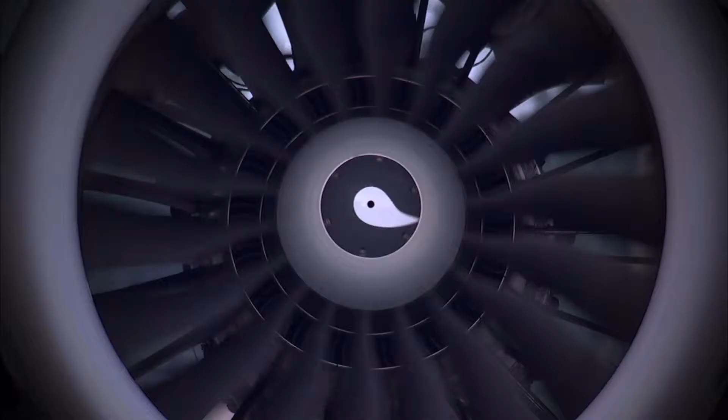The aircraft of today are quieter, more efficient and stronger than anyone could have imagined, even a few short years ago. Of course, future aircraft will continue this trend and become even more efficient and dependable, reaching unimaginable goals that today's aircraft could never reach.

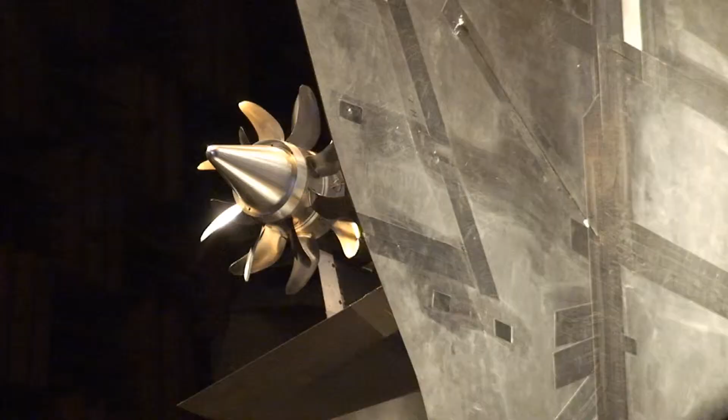But how will they reach these goals, and who is performing the important work to change the way we all fly? The common misconception is that most advances come strictly from major aircraft manufacturers. But the true story is much more complex. Unknown to most of the public is that one of the unsung leaders in aviation is NASA.

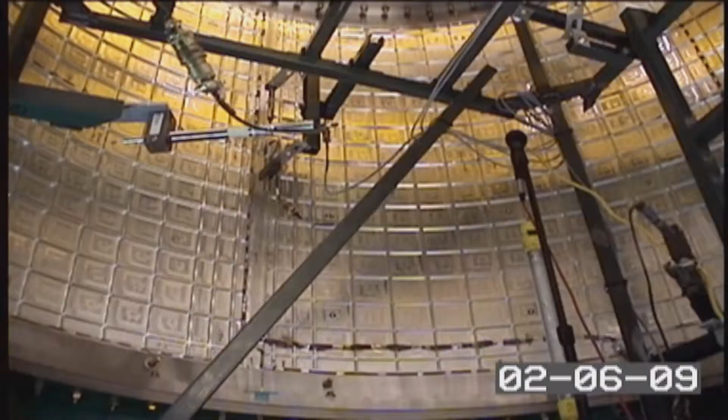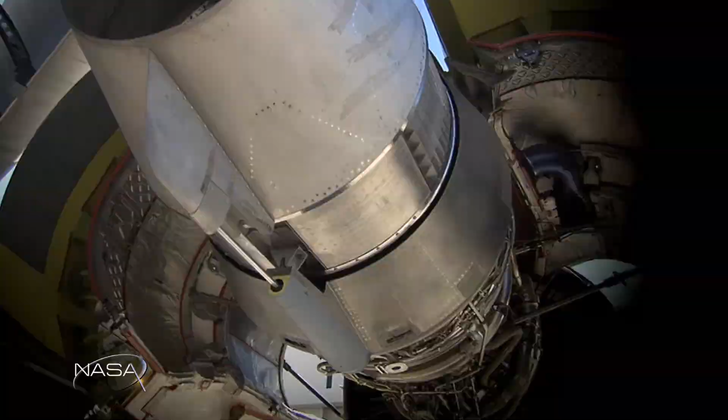NASA engineers work hand in hand with industry planners, developing and testing new designs to make aircraft safer, greener, and much more efficient. On this episode of NASA X, we will look at how this collaboration works, and we'll see how NASA and industry are paving the way for greener, safer aircraft for today and for aircraft of the future as well.

This is a familiar sight for modern travellers. Large metal jets roaring down the runway and lifting into the air. In fact, this sight really hasn't changed that much in the last 50 years or so. Other than the way most people dressed for flights back then, the basic concept of air travel is pretty much the same.

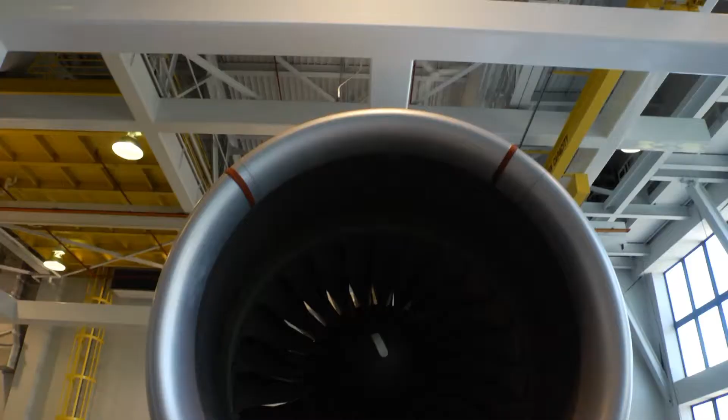There have, of course, been measurable differences in fuel economy, with new developments in engine design and noise reduction techniques. But the basic tube and wing shape and the material used to build these aircraft has remained pretty much the same for years. But that isn't the case anymore.

Like so many products that have evolved dramatically in the last few decades, like phones for example, the same is true for aircraft design. Today more than ever, researchers are pushing the boundaries of the science of flight in their effort to make aircraft of the future more efficient, quieter and greener. So who's taking the lead and why?

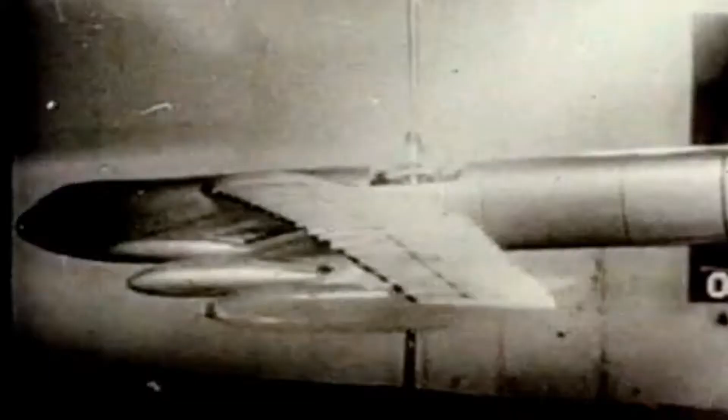Obviously industry is taking the lead in some areas because cleaner operations and more efficiency mean higher profits. But they're just not the only players. One of the leading innovators in aeronautics over the history of flight has been and continues to be NASA.

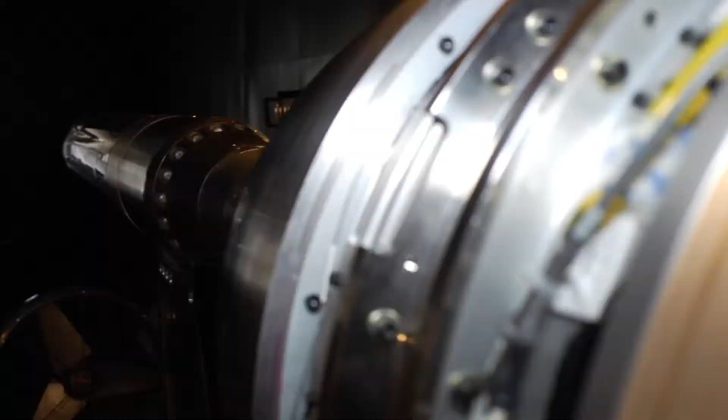The push to modernise and change aircraft of the future is being led by NASA's Environmentally Responsible Aviation Project, or ERA. The ERA project is putting its money where its mouth is with tough but reachable goals to make big changes in how we fly by the year 2025.

So the Environmentally Responsible Aviation Project is a 5-year, 6-year project, and it's focused on advanced aircraft design and the technologies that are needed to enable them. The main goal of the project is to reduce noise, to reduce mission fuel burn, and to reduce LTO NOx emissions. And LTO stands for landing takeoff, oxides of nitrogen emissions.

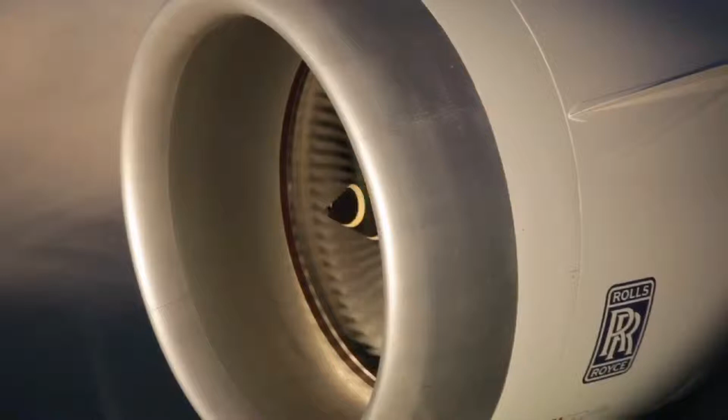And we want to do that simultaneously, and that's never been done before, where we looked at some very difficult metrics and tried to push all of those metrics down simultaneously. And so over this 5 or 6 years, we'll be looking at technologies, we'll be looking at aircraft designs and the combination of those to end up with a configuration that could simultaneously attack these goals.

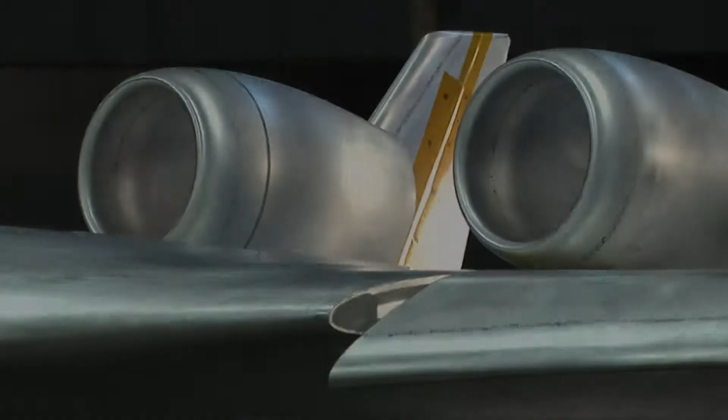So how do you make these goals a reality? The 4 basic principles of flight are lift, drag, weight and thrust. Finding efficiency in each of these basic principles will help reach NASA's stated goals. Let's look at weight first. Obviously, if you can reduce the weight of an aircraft, then you will burn less fuel and therefore become more efficient. Airlines are always looking for ways to carry less weight.

You can see that in extra baggage fees, reduction of heavy items such as ovens and heavy carts on some planes. And in one of the most drastic measures taken in recent years, some airlines have begun asking passengers to use the bathroom in the terminal before getting on the plane, making the passengers a little lighter.

In a 1-month experiment, an airline found that they reduced greenhouse gas by 5 tons simply by asking passengers to use the loo ahead of time. This proves that even small changes in the weight of an aircraft can add up to big long-term benefits. The holy grail, of course, is to make the entire aircraft structure lighter.

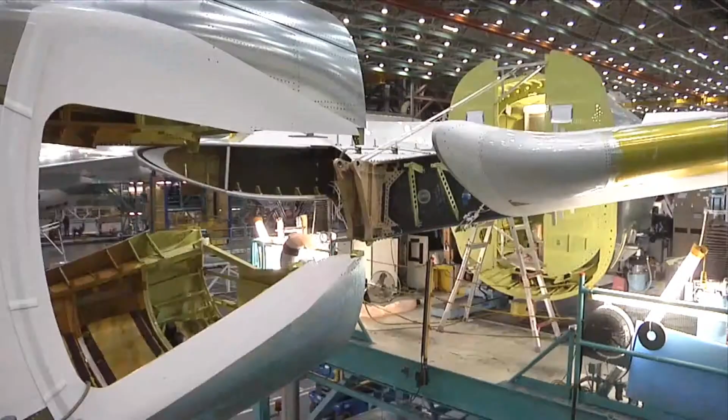So how can this be done? Today's aircraft are made out of metals that are safe, but that are also very heavy. So is there an alternative? In recent decades, NASA and its industry partners have been working hard developing new materials that could bring aircraft out of the 20th century and into the future.

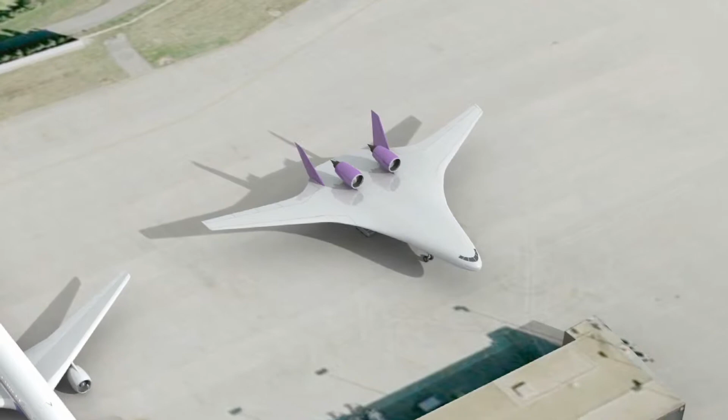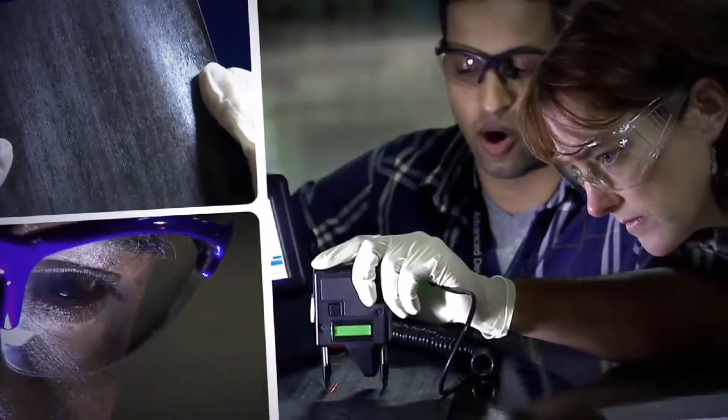New composite materials are leading the charge to replace conventional metals. Aircraft designers are taking advantage of composite materials' lightweight, strength, and flexibility. Aircraft designers have long known about these qualities and have been using something called carbon epoxy composite materials in small quantities for decades.

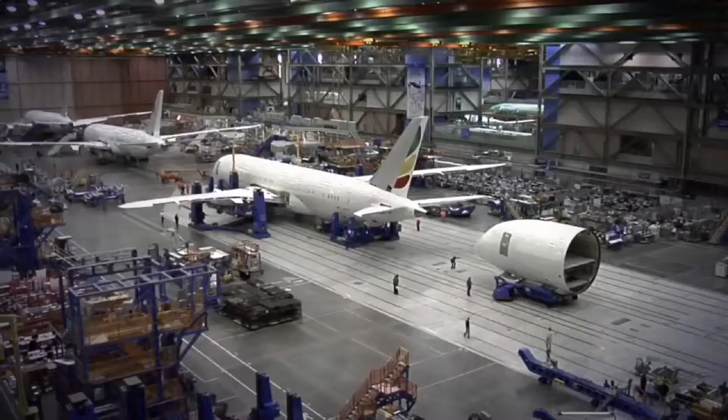After years of research and validation of composites for flight, the Boeing company was the first to step up and build an aircraft almost completely out of composite materials. Called the 787, this next-generation aircraft first came into service in October of 2011. As the first official commercial flight of the 787 took off from Tokyo that year, it was clear that this concept of an all-composite aircraft was here to stay.

NASA is not in the business of building aircraft, but they are in the business of helping lead development programs to move the science of flight along. Once validation and testing in the development process is complete, NASA shares its findings with industry in an attempt to help further research and development.

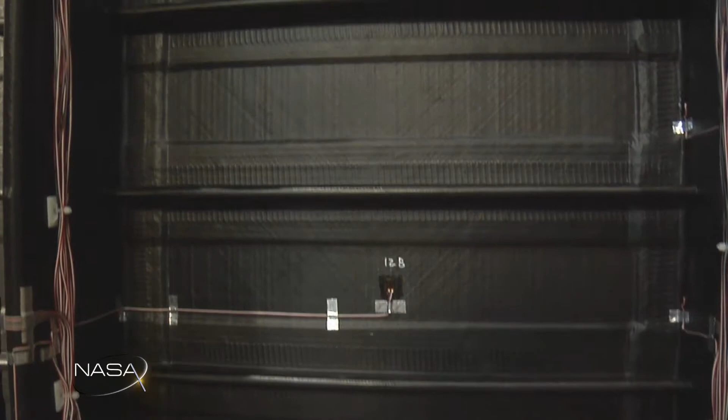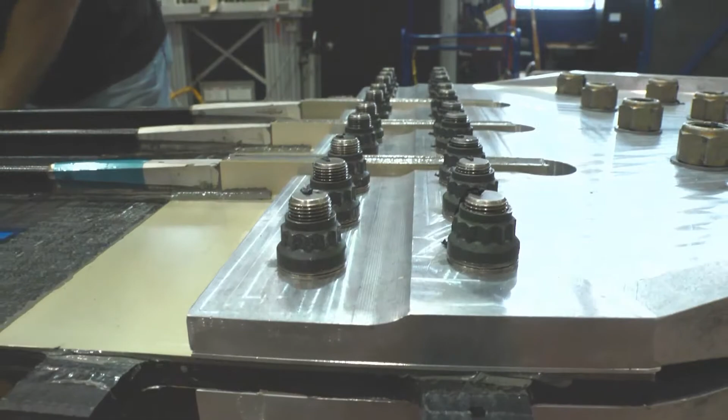One of the programs in which NASA is working with industry is in the development of new composite materials for aircraft. Here, in the Structures and Materials Lab in Building 1148 at NASA Langley Research Center, much of the development of next-generation composites for use in aircraft is taking shape. Called PRSEUS, this new idea has the potential to completely rewrite how composites for use in aircraft are made.

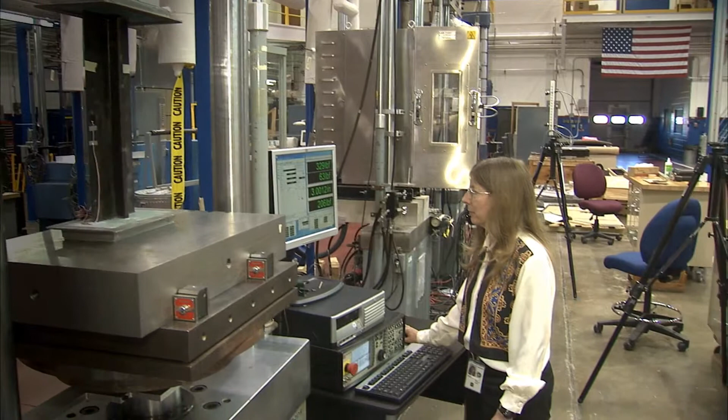Leading much of the research for NASA's environmentally responsible aviation program in the composite field is NASA Langley's Dawn Jegley. This MIT grad has been working with these materials for decades and has a keen understanding of what needs to be done to make these composites of the future fly.

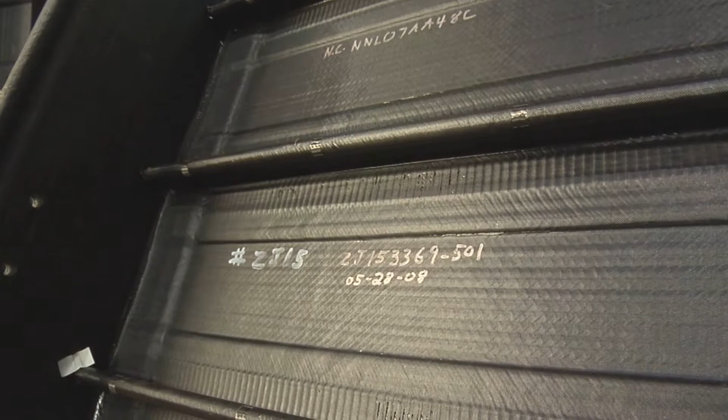PRSEUS stands for Pultruded Rod Stitched Efficient Unitized Structure. And what that means is that we have a graphite epoxy or a carbon epoxy structure, and what we have is pultruded rods inside carbon layers. We have a carbon skin, and we have stitches that run through the thickness that holds the whole thing together.

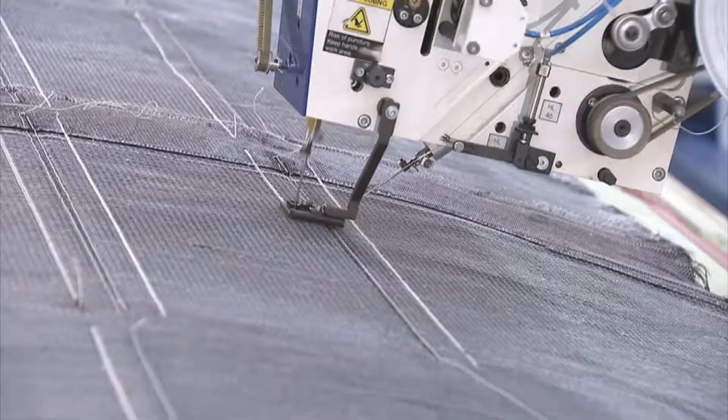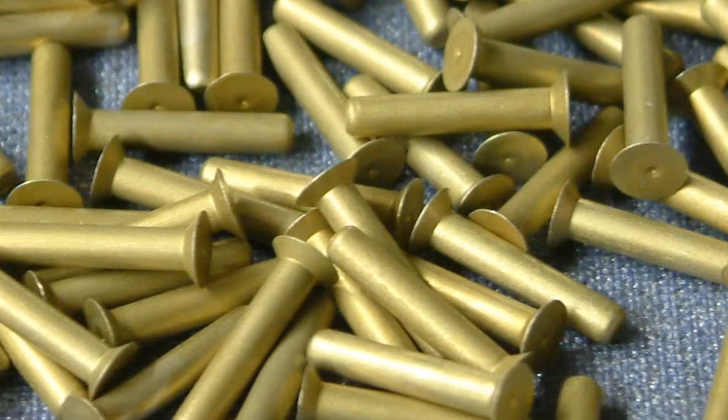One of the huge benefits associated with PRSEUS is its revolutionary stitching technique. On current metal and composite aircraft, one of the key components used to hold the vehicle together are the fasteners, like rivets or bolts. Although these are effective, one major drawback is that quite a few holes have to be drilled into each piece where the fasteners will be added. Not only is that labour intensive, but each hole represents a place where damage or a crack could start. But the stitching prevents that from happening.

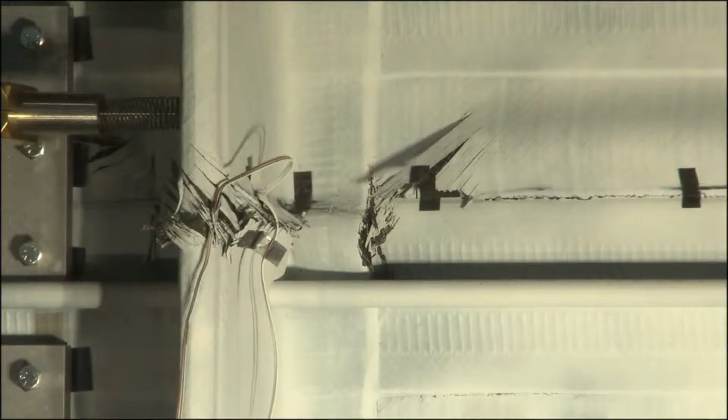We found that if you have a crack and it grows to a certain point and it gets to some place that it's stitched, that crack will turn. So instead of going through the stitching, it will turn, and that's a good thing because in flight you would rather not have a crack grow all the way around a wing. When you look at a piece of carbon epoxy composite material, it honestly doesn't look very strong in its raw form. But once it is in its final state, it can be much stronger than metals.

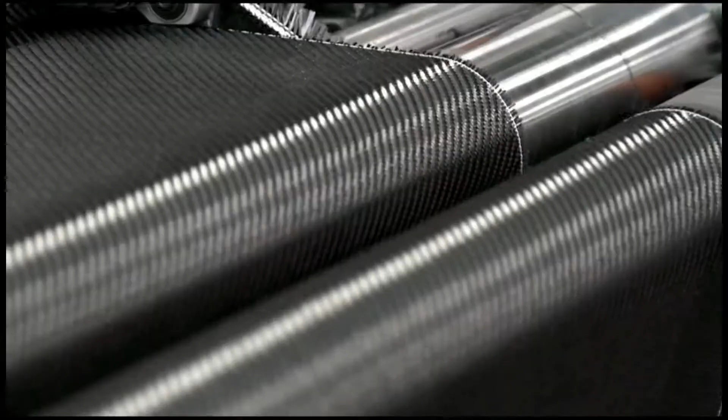We start out with a fabric. It looks kind of like carpeting. And you roll that out into the shape that you're looking for, and you position all the different parts of your structure where you want them, and then you come through with a stitching machine.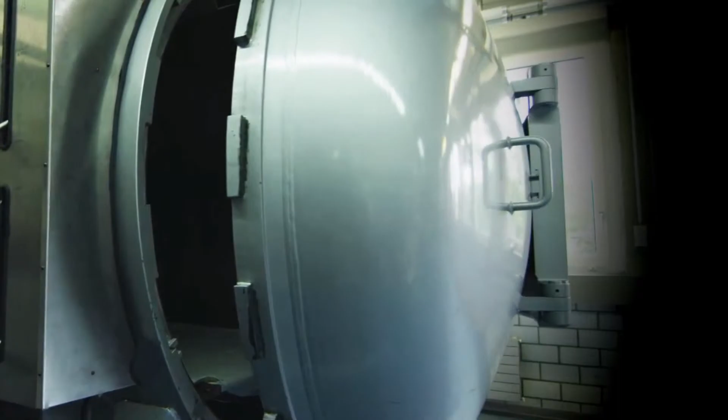After you've stitched the whole thing together, the panel goes into an oven. It's infused with epoxy. We heat it up, and then we get everything just the way we want it, and then we cool the structure. So what happens is you end up with a piece of material, could be a very large piece of material, which is now stiff and strong and just in the right shape that you want it.

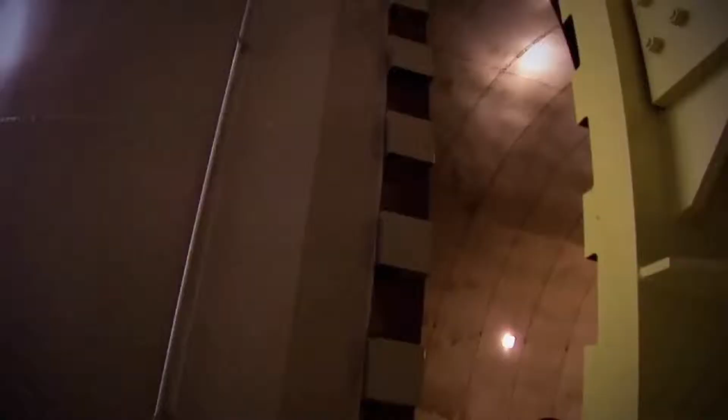Another key component to carbon epoxy composite materials is that they can be tailored to be much stronger than metal. At the molecular level, the properties of metal are isotropic, which means that the properties all run in the same direction. Because of this feature, aircraft designs are very bulky in some areas to provide stiffness, making a craft much heavier. But with composites, you are starting with fibers which are very strong, tough threads, and you can position those threads in any direction you want.

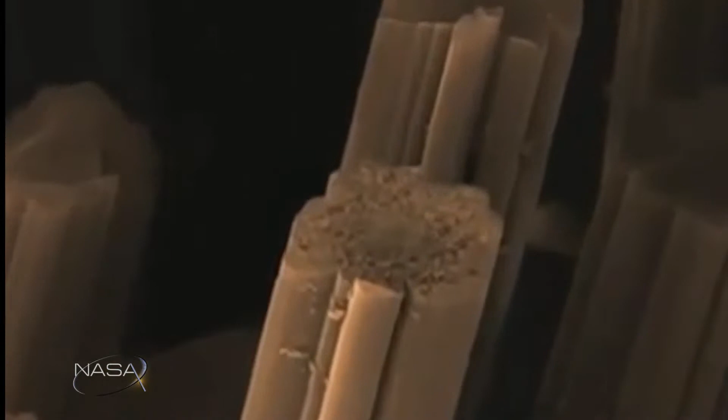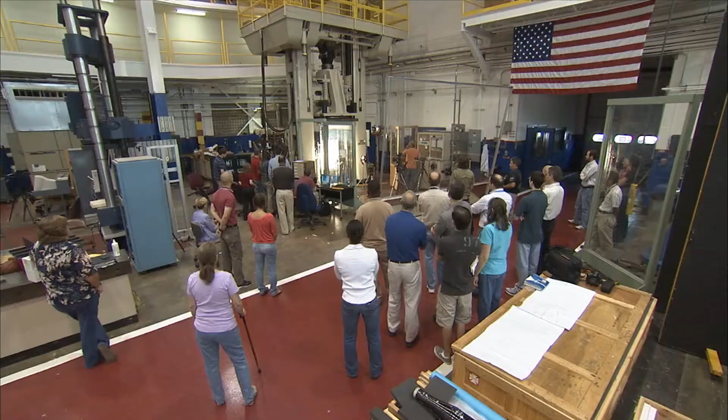For example, if there is an area on the aircraft that takes a lot of load, the designers can place the fibers in that direction, providing enormous strength, but while also using much less material and weight than metal aircraft. Of course, validating that the pieces will work is a major component of the development stage. So I know that NASA really does some great testing of its materials before they go onto any aircraft. How are you testing PRSEUS at the moment?

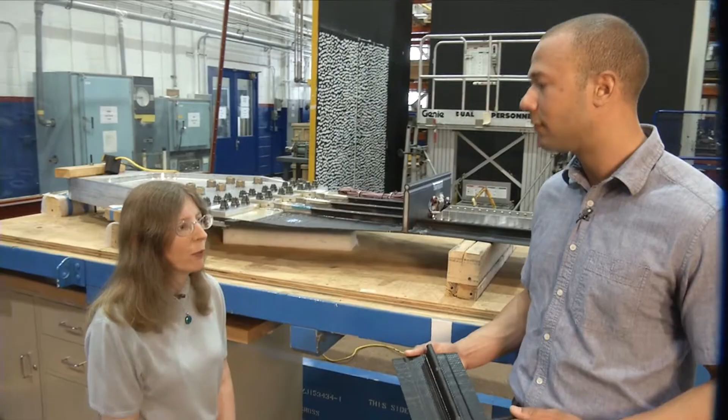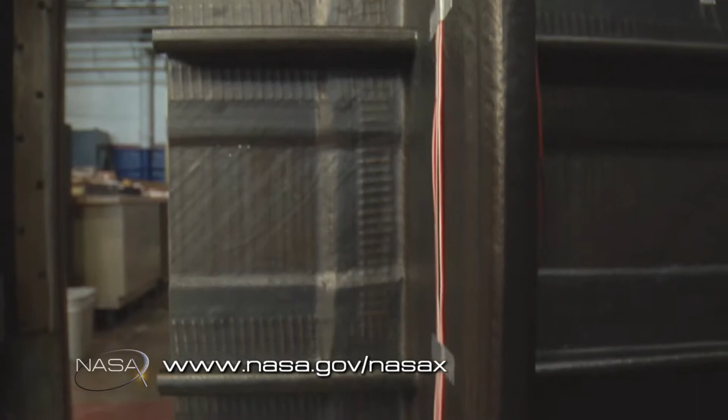One of NASA's goals is to develop technology for future aircraft. When we're developing a new structure, one of the things we need to do is fully understand how it's going to behave. And to do that, we start by looking at very small pieces, and then we move up slowly to very large pieces until we get to a full-scale part of an aircraft.

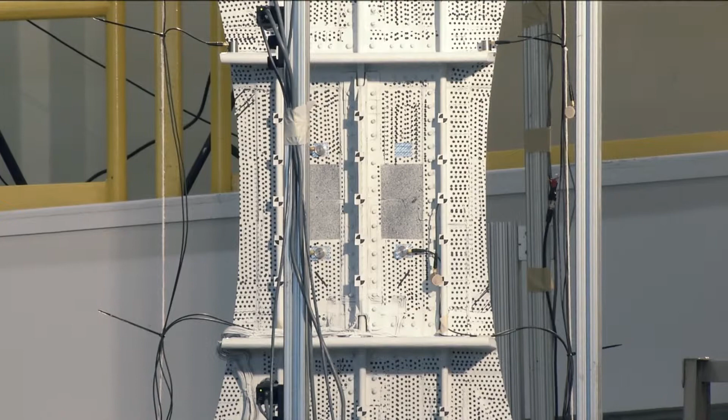And then when we understand that, we go to the next stage, which might be something more like this, where we have what we call a built-up structure. So we have a skin, and then we have a stiffener on it. And then we can apply a load. We might push on it, we might pull on it, we might bend it, to look at how that behaves.

And all the while we're doing this, we're doing analytical studies to make sure we understand and can predict how it's going to behave. Because if we don't predict it properly, then we feel we don't really understand it well enough, and we have to take a step back and figure out what it is we're missing. We have many facilities around the center here that we use for doing those kind of tests.

Well, Dawn, thanks so much for talking to us today about PRSEUS. This looks like an amazing technology, and you're doing a fantastic job. Thank you so much. Thank you.

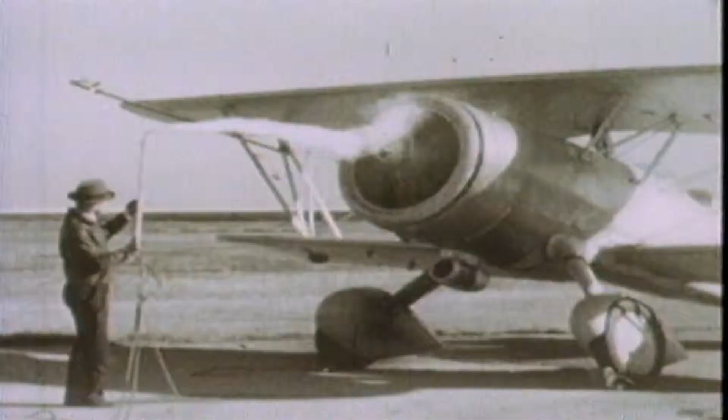Up next, let's look at another of the basic principles of flight: thrust. Since the earliest days of flight, engineers have looked for ways to make the engines we use on aircraft more powerful and efficient. One of the most important early engines was the 1903 Wright brothers design that was used for their very first flight at Kitty Hawk. It only produced about 12 horsepower, but it opened the door for all aircraft engines to come.

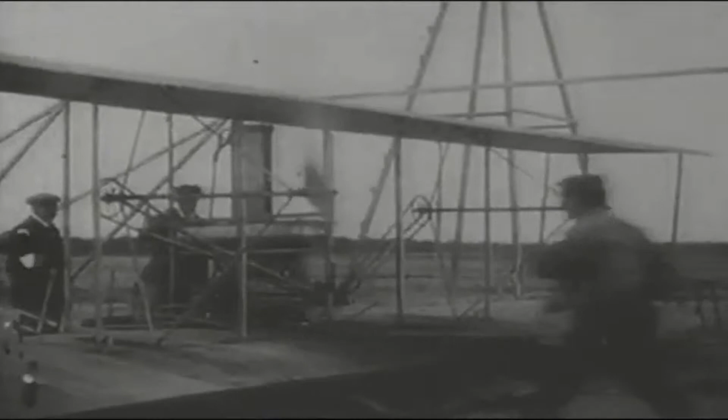Since that time, there has been a steady progression in the development of engine technology, from the relatively simple propellers of the past to the incredibly advanced jet propulsors of today. Engines have never been better, but although current engines are already very efficient, quiet, and relatively green, they pale in comparison to what the next generation of engine technology will be.

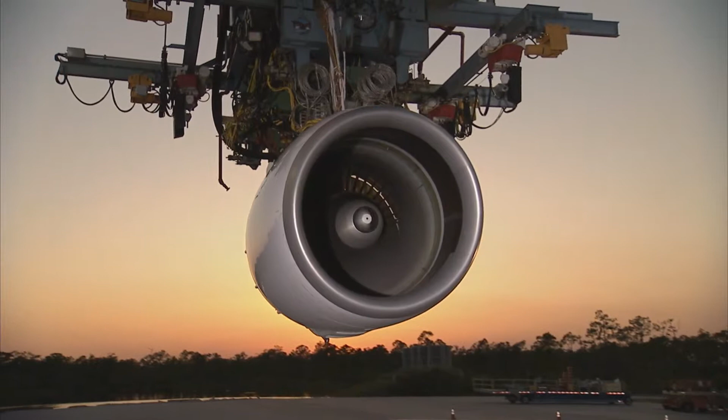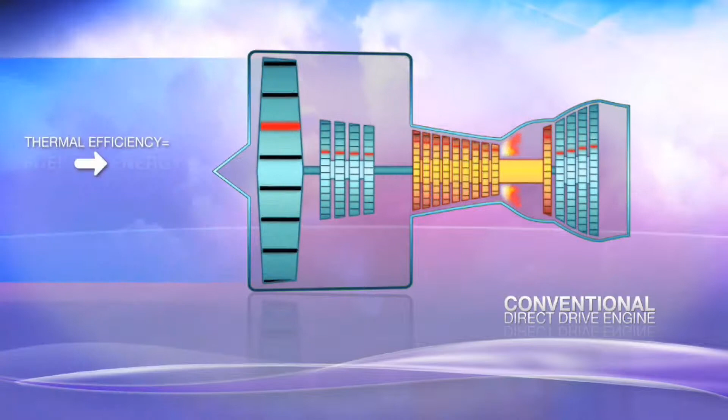To help understand how engine technology is improving, let's first take a look at how a basic turbofan engine works. Incoming air is captured in the engine inlet. Some of the air passes through the fan and into the compressor and burner, where it is mixed with fuel for combustion. The hot exhaust passes through the core and fan turbines and then out of the nozzle. The rest of the incoming air passes through the fan and bypasses or goes around the engine. So a turbofan gets some of its thrust from the core and some of its thrust from the fan.

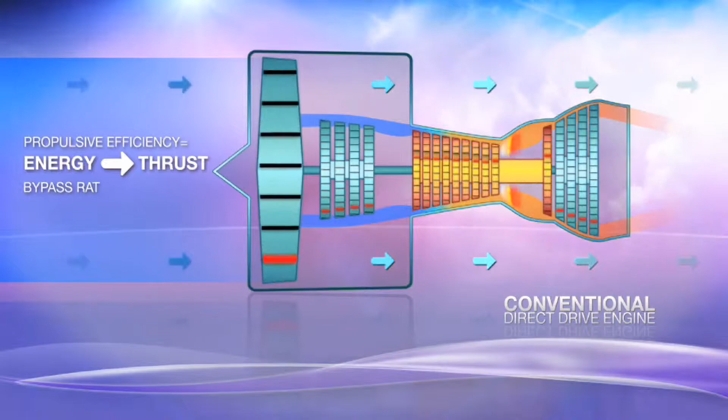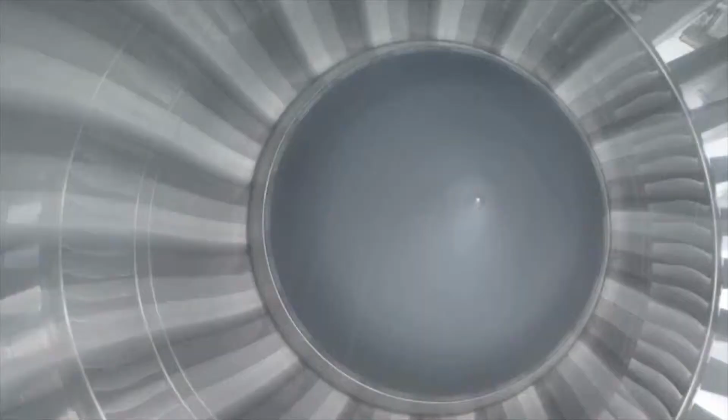The ratio of the air that goes around the engine to the air that goes through the core is called the bypass ratio. Many engines today have a bypass ratio of roughly around 5:1. Engineers have known for many years that if they could increase the bypass ratio, then the engine would become much more efficient. But the trouble with increasing the bypass means that the size of the engine would have to grow, making it heavier and also unable to fit under the wings of most planes. So, what to do? Over the past 20 years or so, NASA and industry have been working on a solution that would create ultra-high bypass engines while also addressing the stated problems of size and weight.

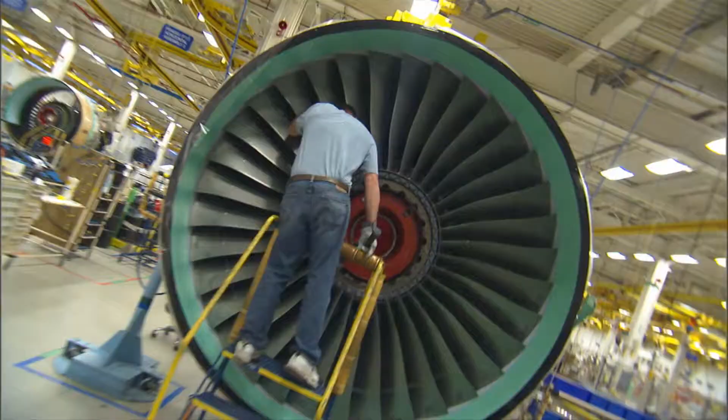Today, a new engine designed in collaboration with Pratt & Whitney and NASA has been developed that will more than double the bypass of current engines. This new engine design has taken many years of research and development just to get to the point where we are today, because three key pieces of technology needed to be created that didn't exist: a new gearing system, an ultra-efficient fan, and a more efficient nacelle.

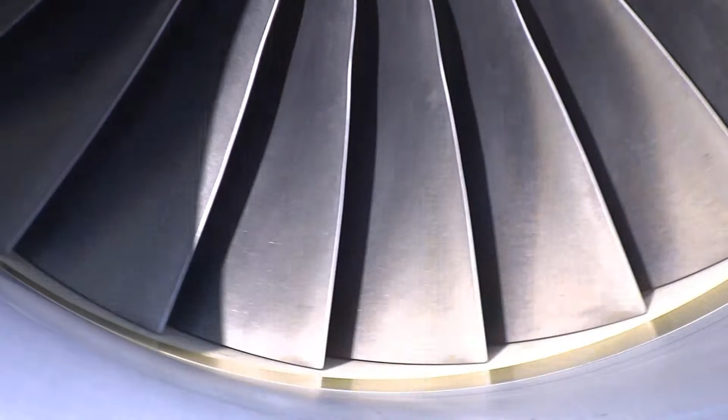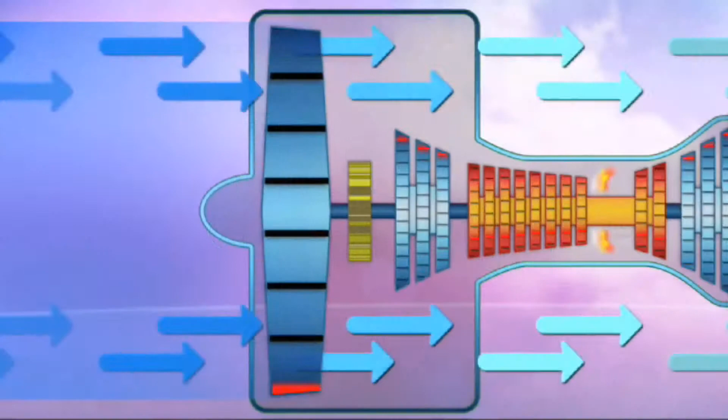Although each of these were difficult to perfect, one of the most challenging was the gearing system for the turbofan. This is because there is a paradox in engine design. The slower the big fan at the front moves, the more efficient it is, but the turbines at the back have to move at a very high rate of speed to work efficiently, hence the paradox. In order to have the slow-moving fan at the front and the fast-moving fans at the back working together, a revolutionary gear system had to be developed that could allow both of these parts to work together optimally.

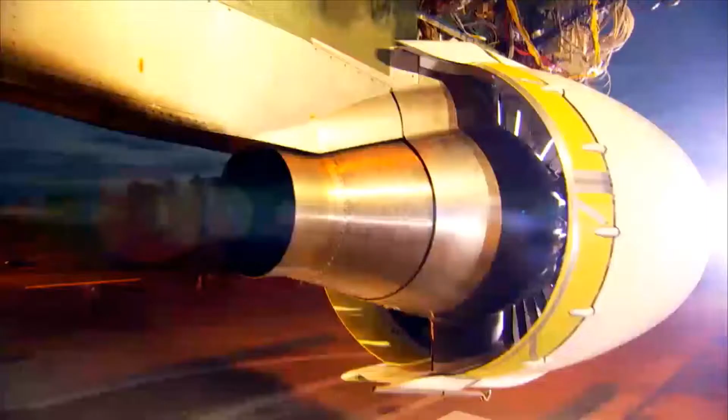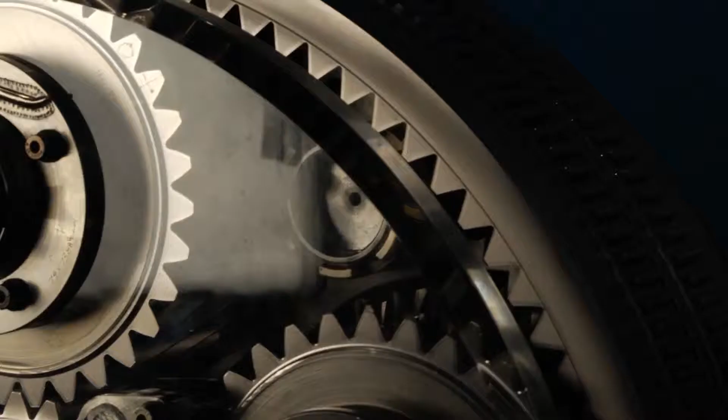So what the gear lets me do is shrink the core engine that makes the power to a large degree. It makes it lighter, takes a couple of thousand parts out, and it means I can replace some very rare super alloys with some more common gear steel. We always knew you could do that, but you need a gear that's way over 99% efficient. We're talking about 25,000, 30,000 horsepower gears.

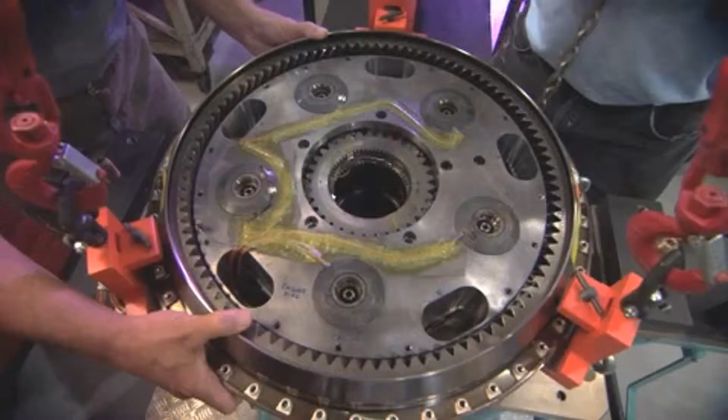A naval ship has that sort of power, and the gear is the size of a small house. We had to develop a gear that's the size of a small automobile wheel, not a house, and it has to last 20 years without maintenance, and it has to be super efficient. And so we've been working on this for at least 20 years.

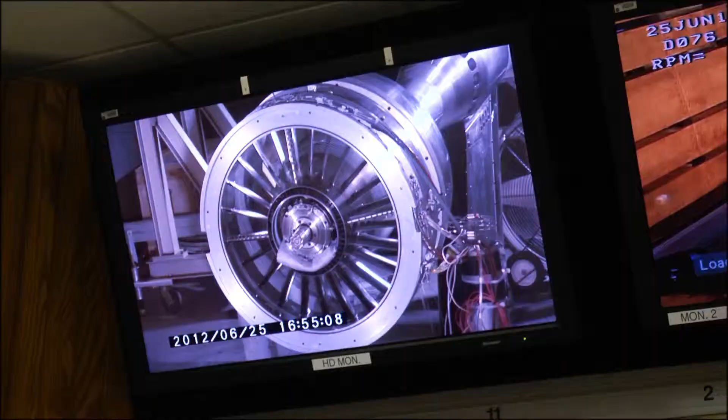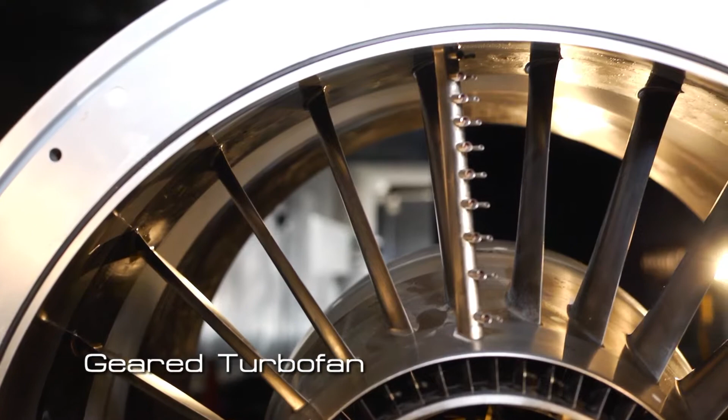Much of the testing for this engine has in fact come at NASA laboratories. NASA's unique facilities and subject matter experts have helped the Pratt & Whitney team to understand how to configure the ultra-high bypass engine. So this is an example of the ultra-high bypass engine from Pratt & Whitney called the geared turbofan. This particular engine has a bypass ratio of up to 15:1, which means 15 times the amount of air goes through this part of it as goes through this part.

This is the core, or the engine part. This is the bypass part. In this particular engine, most of the thrust is generated in this part, and we've removed the fans so that you can see how small the engine airflow is compared to the overall flow.

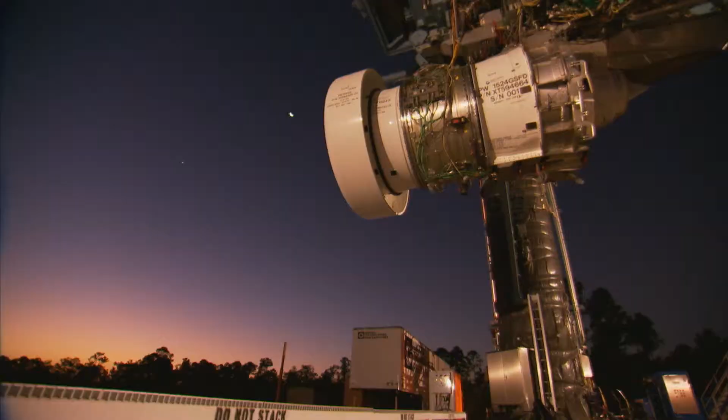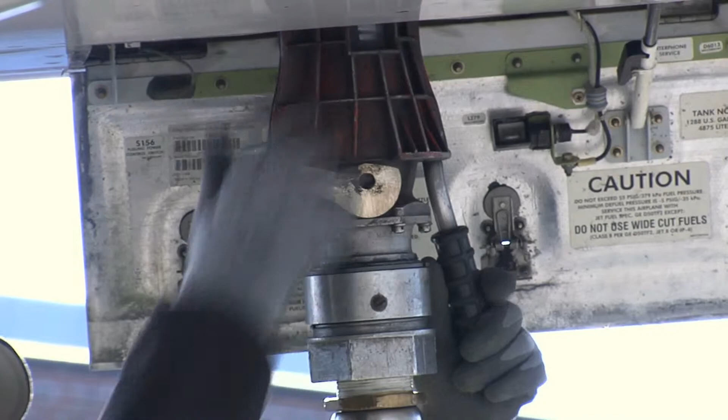So why do we want to do this? Well, this particular design, especially the one Pratt & Whitney is working on called the geared turbofan, has the potential of having as much as 20% better fuel burn than a regular jet engine today. And the reason they can do that is because the more air that you can put up here, the more efficient the engine is and the better the fuel economy. Because fuel costs have spiraled out of control in recent years, the fuel efficiency of this engine could be a game changer for the aircraft industry.

The people who care are not so much Airbus, but their customers, the airlines. So an A320 with these engines on compared to the current engines will save $200 to $400 an hour, on the order of $1.5 million to $2.5 million a year reduced fuel cost, depending upon the cost of fuel, typically. So it's worth millions per year for the airlines. That doesn't mean they still won't charge you for the extra bag, though.

Of course, fuel economy is not the only huge benefit to this engine. Its noise reduction capability is truly astounding. On a typical jet aircraft, the fans at the front are moving at more than the speed of sound, making them very noisy. But because this new engine's forward fans move slower, they now make much, much less noise. They are really quiet. And how quiet is really quiet?

For a 737-sized airplane, a 150 passenger airplane, the objectionable noise on the ground, the area that hears objectionable noise, is reduced by about 3/4. Almost to the NASA goal, which is to keep it in the airport.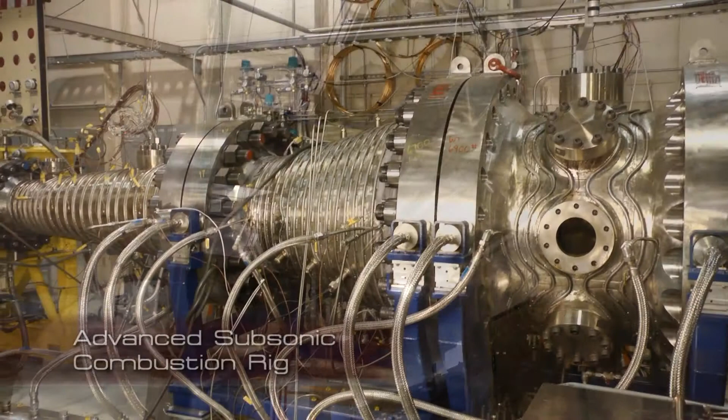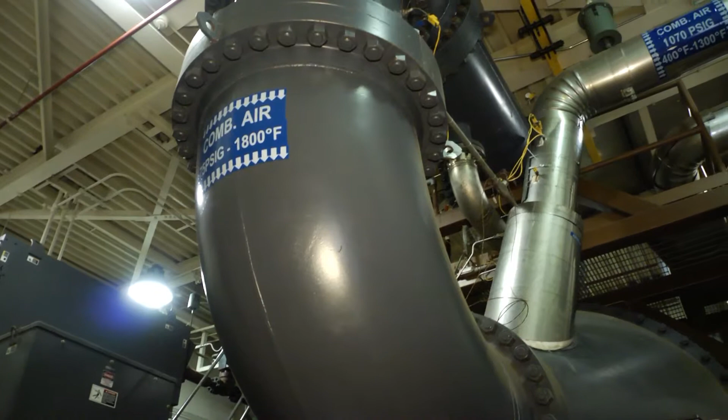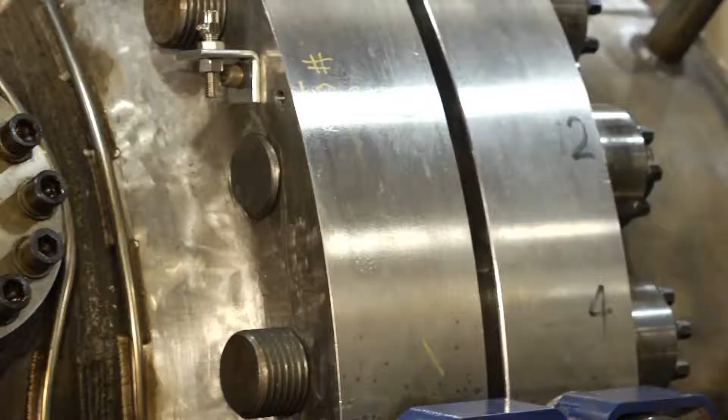Another key component in the testing chain of the entire engine happens here at NASA Glenn, in the Advanced Subsonic Combustion Rig, or ASCR. This facility is the only one in the country that allows real-time, real-world testing conditions for engine combustors. This is the Advanced Subsonic Combustion Rig. It's really one of the unique facilities in the U.S. which enables us to test combustors and gas turbine engines at realistic conditions that they would see in a gas turbine engine flying in today's aircraft and even those in the next 20 years from now.

The real beauty of this rig is it allows us to operate pretty much over the whole flight regime. So we can map out what the emissions are near the ground during idle and takeoff conditions, but also on approach and landing, in addition then even at cruise, because we're also becoming more and more concerned about emissions in the atmosphere and what that does to our environment.

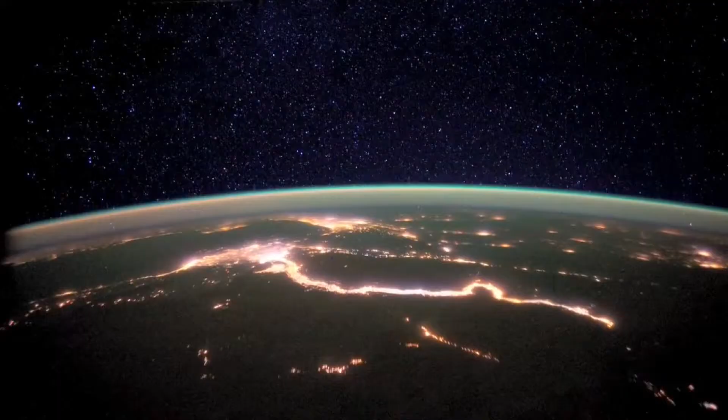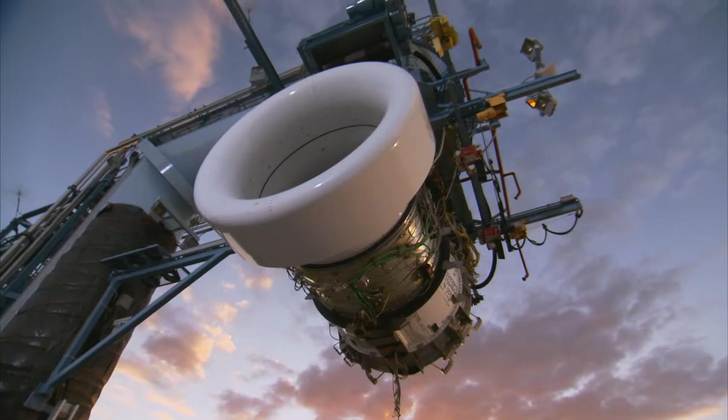The environment is one of the key components in much of the work going on now. NASA and industry realize that good stewardship is not only beneficial to the planet, but can be a good business model too. The work that is coming out of this program is looking at both fuel-flexible applications as well as strictly environmental concerns. Our geared turbofan is 15% more efficient and can run on a wide range of fuels. In fact, we're some of the leaders working with the industry in the development of biofuels.

Of course, testing for these new engines is not only happening at NASA, but can also be seen on a unique airplane owned by Pratt & Whitney. Pratt & Whitney actually owns two 747 airplanes that we do testing on. There are 4 engines on a 747. We'll actually take one of the existing JT9Ds off, which is a Pratt & Whitney made engine that powers 747s, and we'll actually in some cases replace that engine with one of our test engines. So we'll run the airplane on 4 engines, 3 of which are currently certified on the airplane, the 4th being the experimental.

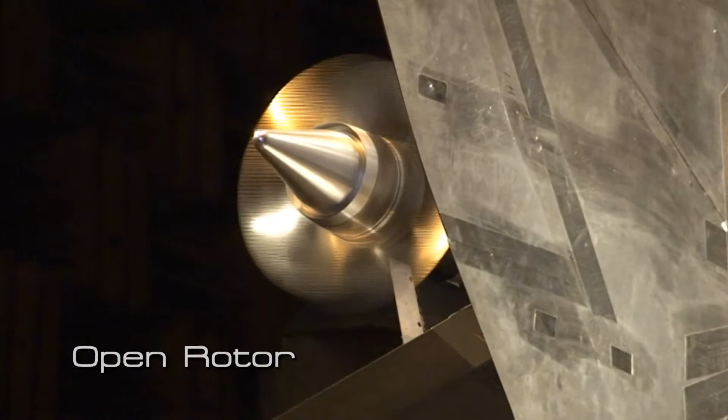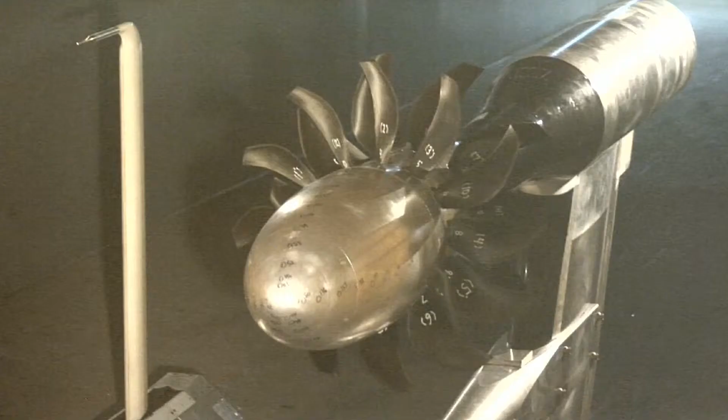Of course, this new geared turbofan is not the only game in town. NASA has also taken a look back at some older technology, including a concept called the open rotor that also shows much promise. So here at NASA, we're working on the next generation of engine technologies, both ducted engines like the geared turbofan and unducted engines like open rotors. So we recently finished a series of tests with General Electric and the Federal Aviation Administration on open rotors, looking at these technologies to reduce fuel burn and improve the acoustic performance of these next generation engines.

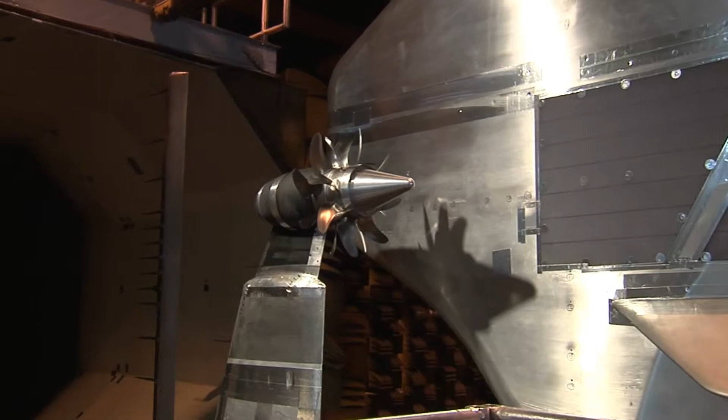So as you try to go to higher and higher bypass ratio engines, the fans keep getting larger and larger diameter, and at some point it just makes sense to get rid of the cowling and go with just what essentially looks like a propeller. The difference is that these are very specialized high-speed propellers, so that an open rotor powered aircraft would be able to fly at essentially the same speed as an aircraft with a jet engine.

In the past, the open rotor concept had been promising, but the major drawback was the noise. Thanks to the advent of modern computational fluid dynamics, NASA and industry engineers have been able to redesign the blades for these open rotors and make them much, much quieter. The system studies that NASA's done has shown that for single-aisle aircraft, if we built an open rotor engine today and put it on an aircraft, it would probably be quieter than most of the aircraft that are flying out there right now. So we've come a long, long way in being able to solve the acoustics issues that were part of the original unducted rotor program.

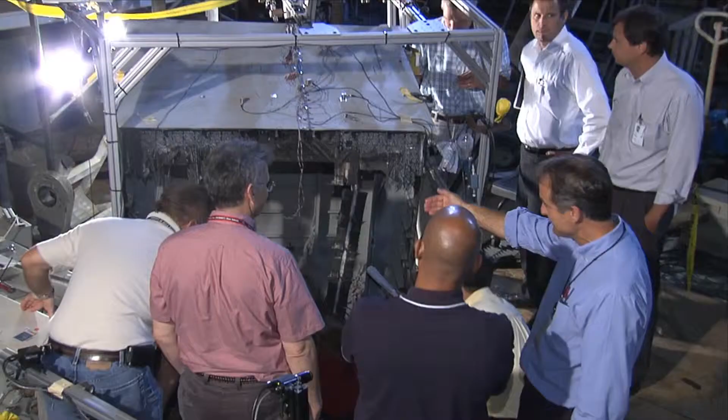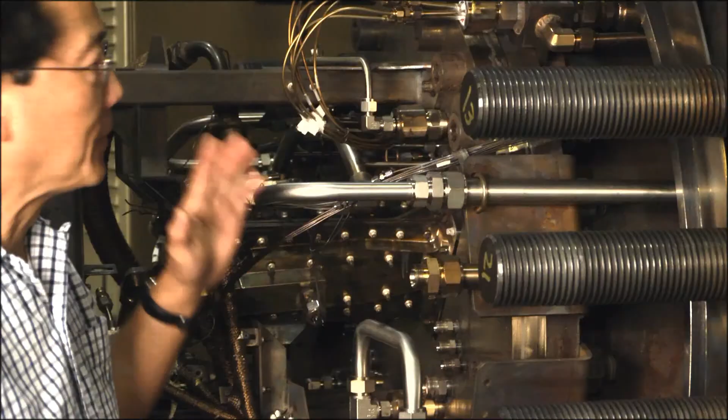So, there you have it. NASA's ERA program and industry are truly changing the way we all fly. NASA is pushing the industry hard to make these changes see the light of day, and industry is responding with truly innovative and groundbreaking technologies. With this type of collaboration and work ethic, there's no doubt the world will soon see a dramatic difference in the way we all fly.